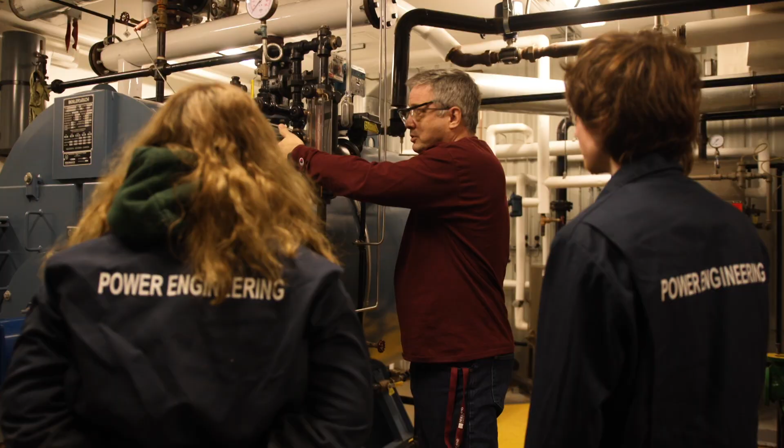I find it's just easy to get into and easy to get started off with. I find it's a really good job. If someone's not exactly sure what they want to do with their life, like I was not exactly sure where I was until this. And this, in my opinion, is the perfect option to get started off in life.

When I chose power engineering, it was because my parents were talking about it in the kitchen, and I was really interested in it. So I searched it up online, watched the introductory video, and that was what I wanted to do. We are operators. We operate the hearts and souls of all the factories, all the power plants.

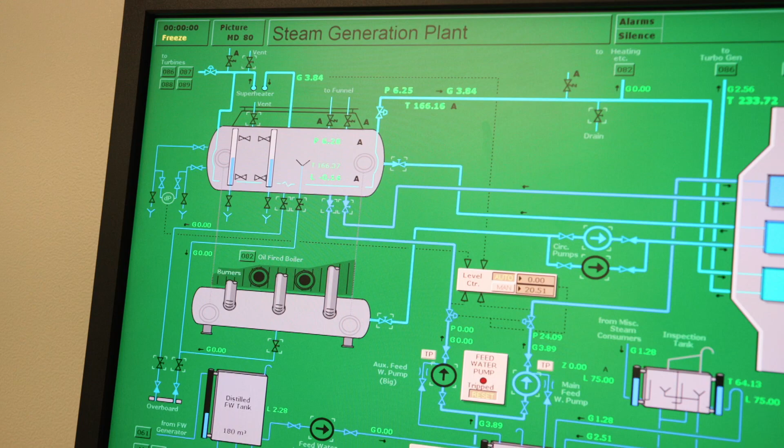All the refineries - if it wasn't for power engineers, every factory, every oil refinery, large industrial site like Cavendish Farms, the garbage burning plant, the hospitals, they would cease to have heat, lights, and emergency power. We are the guys behind the scenes that nobody knows about who keep the heart and soul of industry running. A nice thing about power engineering in general is that these positions are required for these plants to operate. They can't operate without power engineers, so it makes you a very valuable employee.

I was not expecting the course to be this short, I'm going to be honest. I was expecting it to be at least 2 years possibly. To graduate right after I just graduated is definitely a weird experience, that's for sure. But it's also kind of nice to know that I'm jumping right into the work field, being able to actually start making money and have a job and start building my future.

You don't have to have any experience in the field to enroll in a power engineering program. It's designed for people with no background. If you do have background in the field or in related fields, all the better.

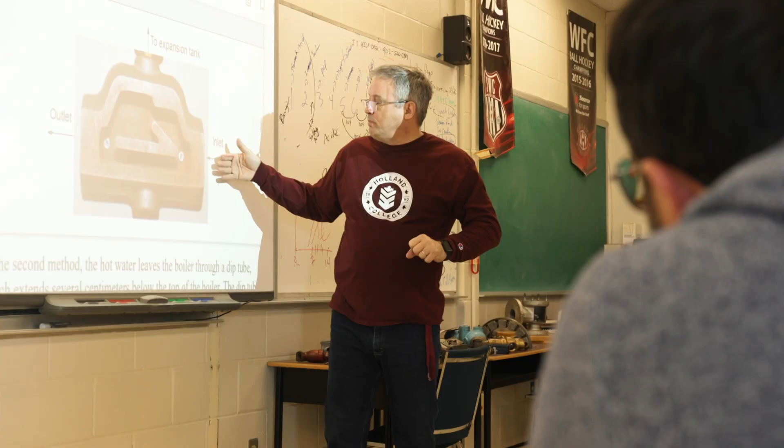The power engineering program at the Marine Training Center in Summerside is a 9-month program. It starts in the fall, September, and goes till the end of April, 1st of May. There's a Part A and a Part B. Part A takes us up till Christmas time, and in Part A we cover components like basic boiler theory, electrical theory, motors, and applied mechanics.

So if you're coming into this program, you have to have a little bit of math and science. It's not break-your-soul math and science. It's pretty basic. All the stuff that we teach is applicable to the occupation.

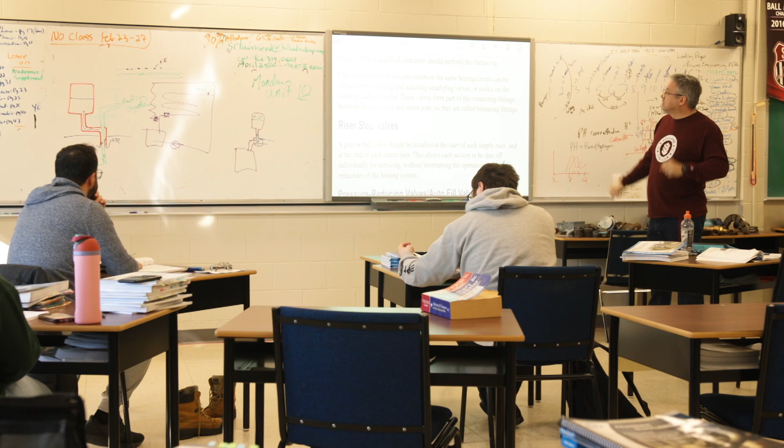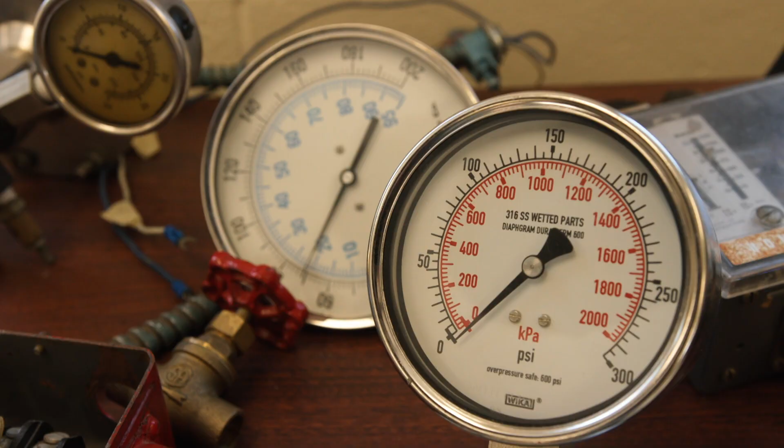The second half of the program is what we call the B side, or the B paper. In that B paper, you're going to learn a lot more about instrumentation, and get into refrigeration pretty heavy, because that's a big part of our component. We don't just run boilers and steam turbines and gas turbines - we also do industrial refrigeration. These are the large ammonia plants, large refrigeration plants. That's a big part of our occupation.

We're going to learn different types of plants. So where the A side may be a little heavier on the math and the science, the B side takes you more into the practical aspects - take apart pumps, run boilers, refrigeration. If you're really good at mechanical stuff and science stuff, I think this program would be a great choice. It's the best of both worlds.

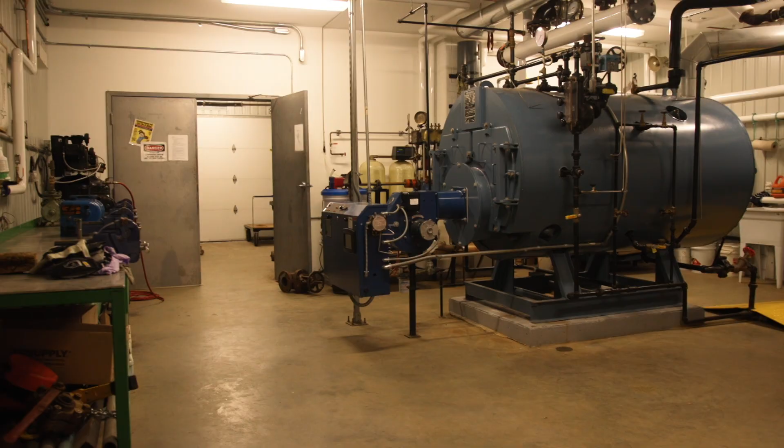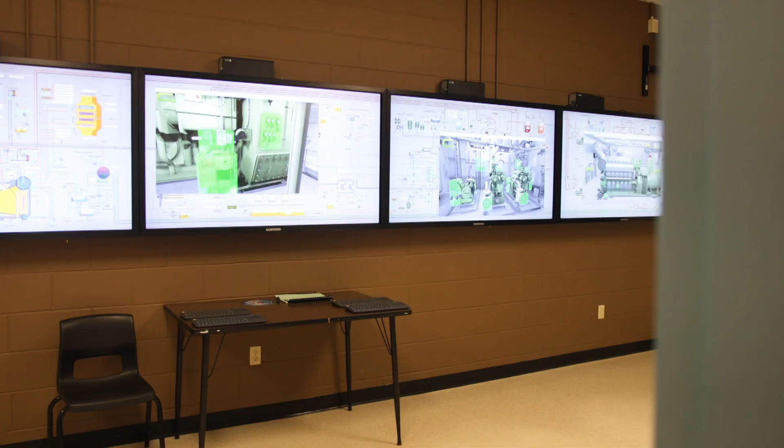The power engineering program at Holland College is a nice mix of classroom time and hands-on learning. You get to work in the power engineering lab, so you have actual hands-on time with tools and equipment down there. And you also have some time in the simulator, the power simulator, so you get to work on sort of virtual machinery there.

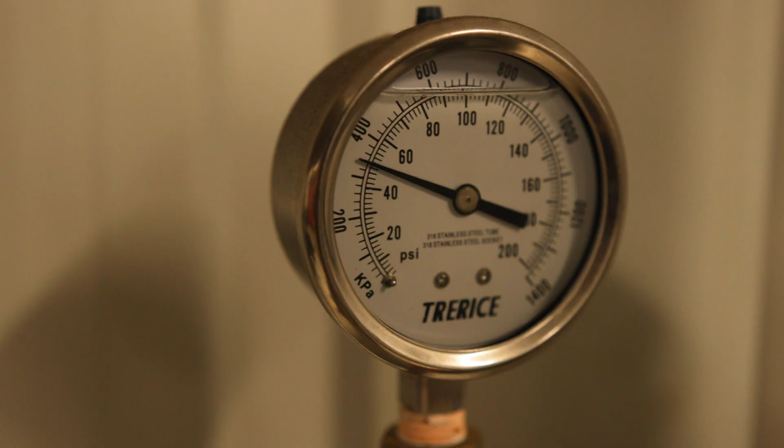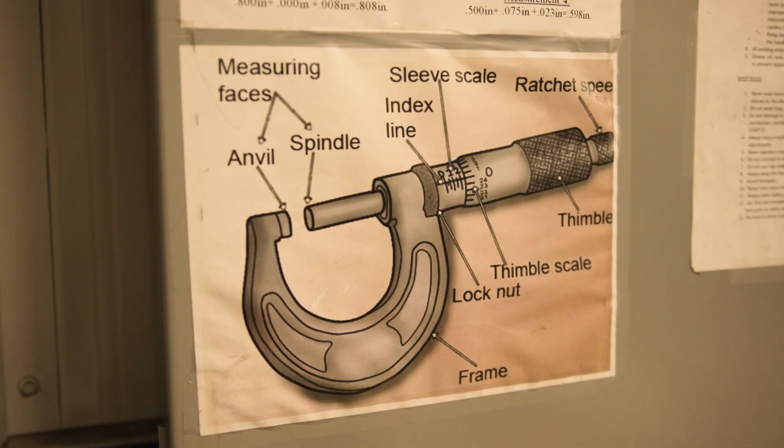In addition to getting your 4th-class power engineering license, we also give you the skills in this 9-month program for basic light maintenance and mechanical stuff. You're introduced to a little bit of welding, working with wrenches and tools, threading pipe, gears and sprockets, taking things apart. So you're not a mechanic when you leave, but you do have a lot of light maintenance experience, where you can keep the stuff that you're responsible for running - maybe not tear it down, but at least maintain it.

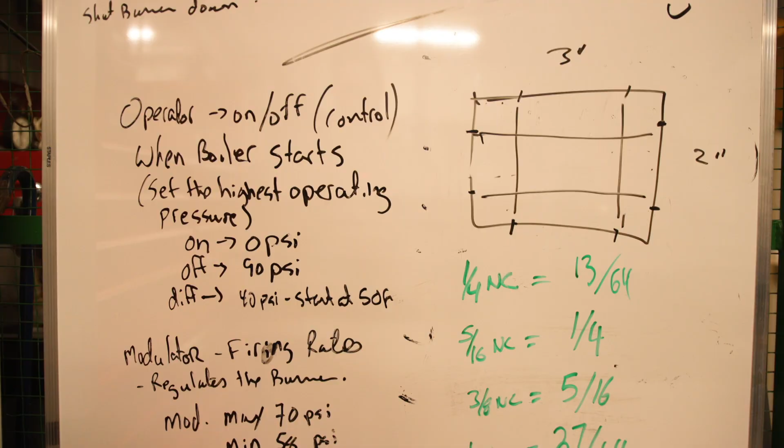But you're also exposed to a lot of the other theory, like what an electrician has to understand. We're not expert electricians, but we understand what they're doing. We're not expert refrigeration or HVAC techs, but we understand what they're doing.

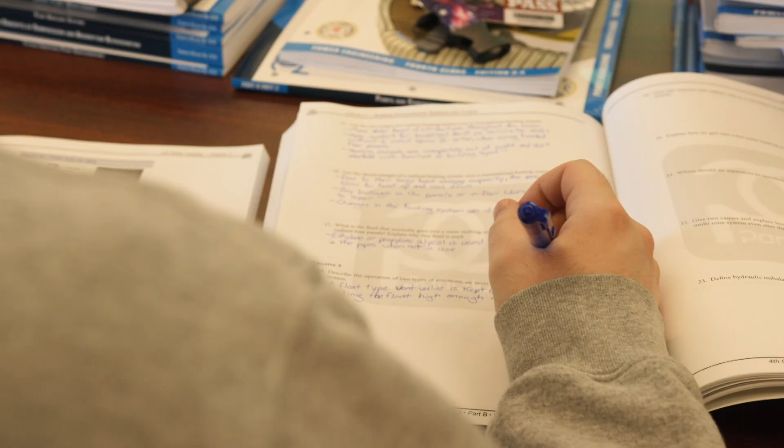And we can have a conversation with all the other Red Seal trades, because we touch on all of the Red Seal trades on the mechanical sides. We don't become experts, but we do have a working knowledge of what they're doing.

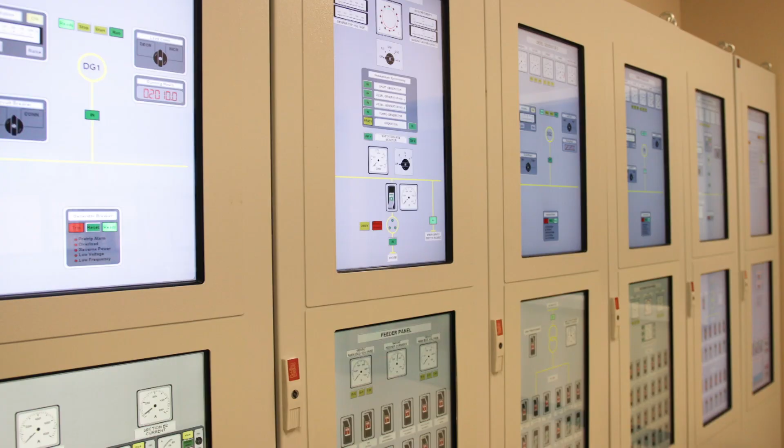A successful student in the power engineering program will have good math skills, have a good background in high school science, chemistry, physics, but mostly the most important thing is to have an interest in how things work and how machines work, because that's really the core of what you're going to be doing as a power engineer. You're going to be operating machinery, monitoring machinery, and you have to know how that machinery works to be able to do that efficiently and effectively.

The instructors in this program are amazing. They know what they're talking about. They're not reading off the textbook, they have experience. And they apply that experience to what they're teaching with all the fun little stories and all the pictures and all the plant tours.

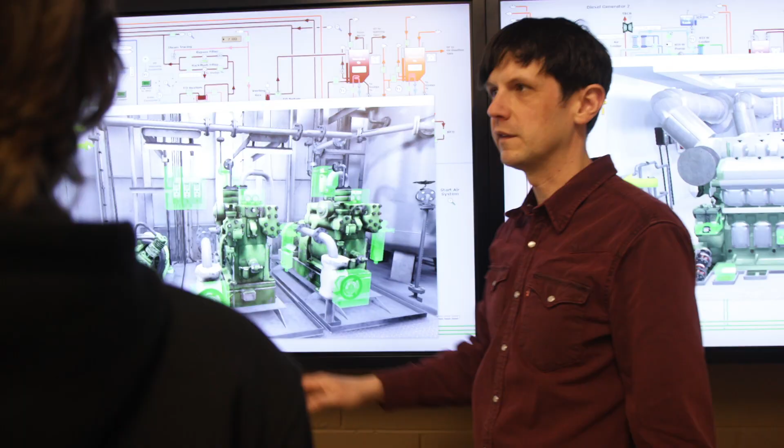I will say, they're great. They're really kind and they're reasonable and they're respectful and they're very understanding. Compared to every other teacher I've ever met, I'm gonna be completely honest, best instructors ever. They're also very flexible. Like if you need time to work on things and there's a due date, they will sit there and they will be like, it's good, we'll extend it just as long as you get it done. They're amazing. I couldn't ask for better professors.

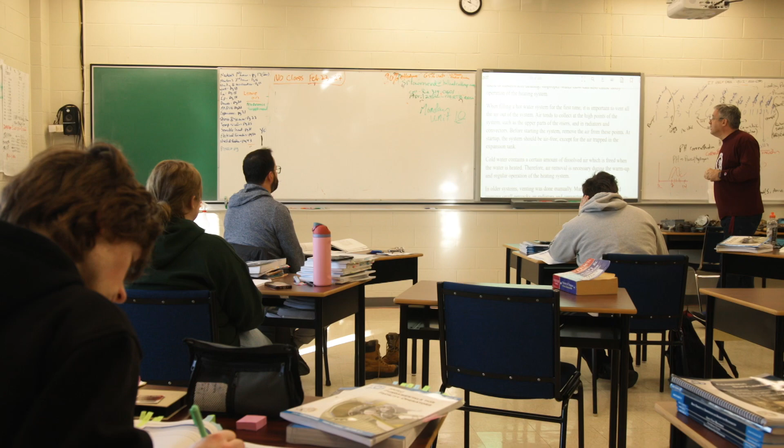At Holland College, we're lucky to have a small class size and a low student-teacher ratio compared to some other schools. So you have lots of access to instructors, lots of access to help if you need help, and the instructors are very willing to give you that extra help.

In this course, in this 9 month program, you have 2 weeks of OJT, on-the-job training. I will assign you to a place for 2 weeks working with another power engineer, and you go out with a pretty extensive project book, like 8 or 9 assignments you have to do. And those assignments will take you into all aspects of this occupation.

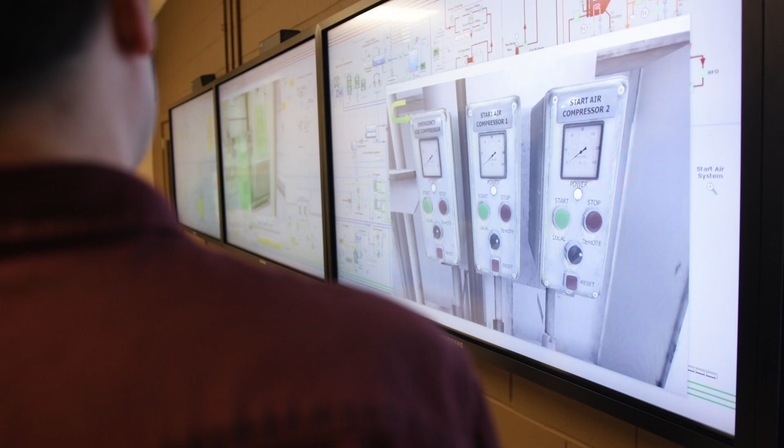I had an amazing experience with my on-the-job training. I learned so much, more than what I've learned in class. They would explain to me things that I would have had no clue if I didn't do the on-the-job training. Whenever you get off, you look at your textbook and you're like, wow, I understand this more clearly now, because you watched them do exactly what you were learning.

On-the-job training, starting off, I was a bit nervous. Going into a workplace right when I just started, it was a bit nerve-wracking. Didn't really know what I was going to expect. Coming back and reflecting on it, it was a really, really good learning experience. Being able to see all the equipment and all the systems that we've been only reading about, it was an eye-opener.

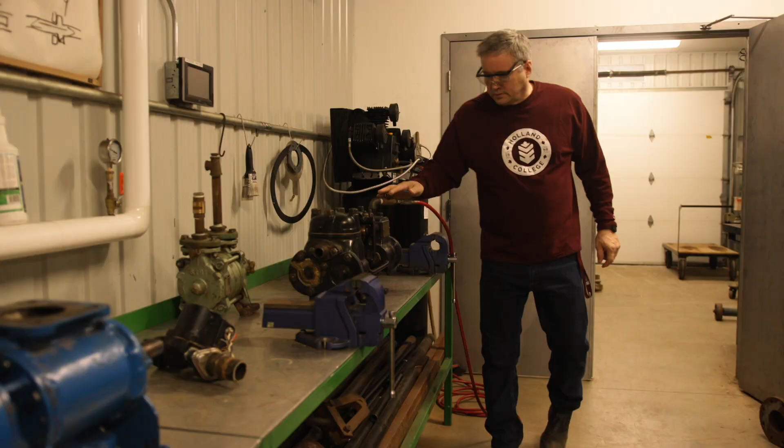Sometimes your OJT will lead to employment in the future if they ask you to come back or you're a suitable operator or they need someone with your specifications. Many of the employers have hired their OJT students. I've had a number of employers that didn't want to let their OJT students go, wanting to know could they stay and then write the exam later, but they have to write the exam. But every student I've had out of this course in the last 4 years has walked into a job.

My time in the program has been a lot of work and a lot of stressful work, but if you keep on top of it, it's a lot simpler than what it looks like. Like yes, there's the workbook and there's the online courses, but it's much like high school in a way. As long as you stay on top of it, it's relatively easy, but it's still a challenge. You're still challenging yourself every day.

If you're someone who is interested in how things work, how machines work, how processes work, how industrial processes work, you should definitely consider power engineering. In this occupation, you're never bored, you're always challenged, and it's always room for growth.

For someone who just got out of high school, just starting their life, and nervous of what's to come, I can proudly say that power engineering was probably the perfect and best option I could choose. I would say if you're really considering this program, choose it. It's probably one of the best decisions I've made, and it has opened a lot of doors for me.